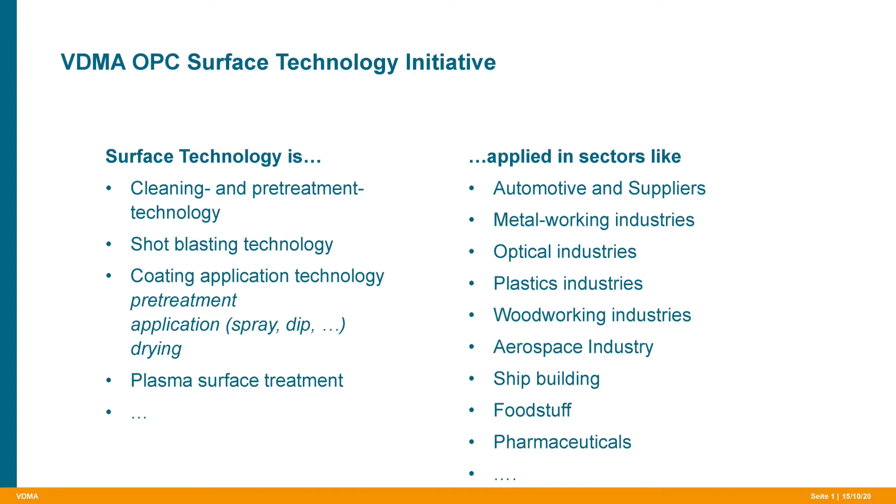Looking at the paint application plant, you can see there is a lot going on. We have pre-treatment, drying, paint application stages, sometimes multiple times, depending on your workpiece and the intended use.

I don't want to go into all the detail here, but obviously this goes beyond what used to be a tin can with paint and a brush to apply the coat on the object.

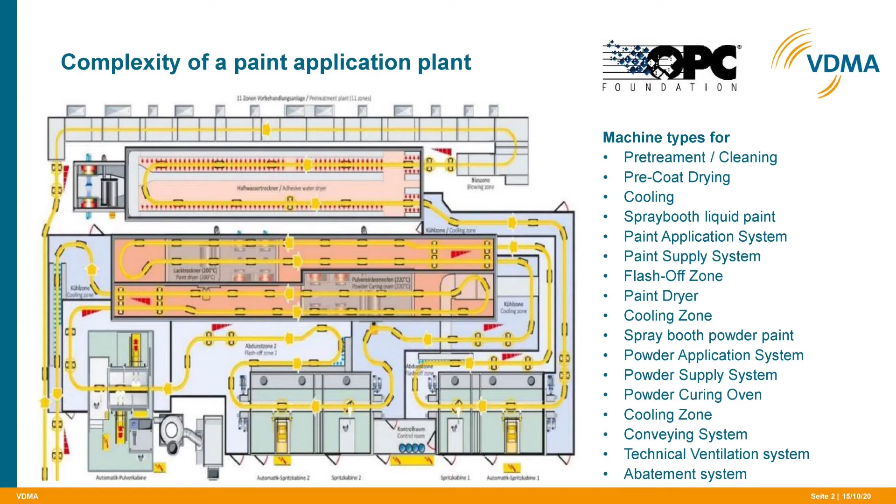The current focus of our working group is on the material supply system. This takes care of preparing material for application with mixing and pressurization and delivering it to the application system, like a spray gun operated manually or a robot-mounted spray nozzle.

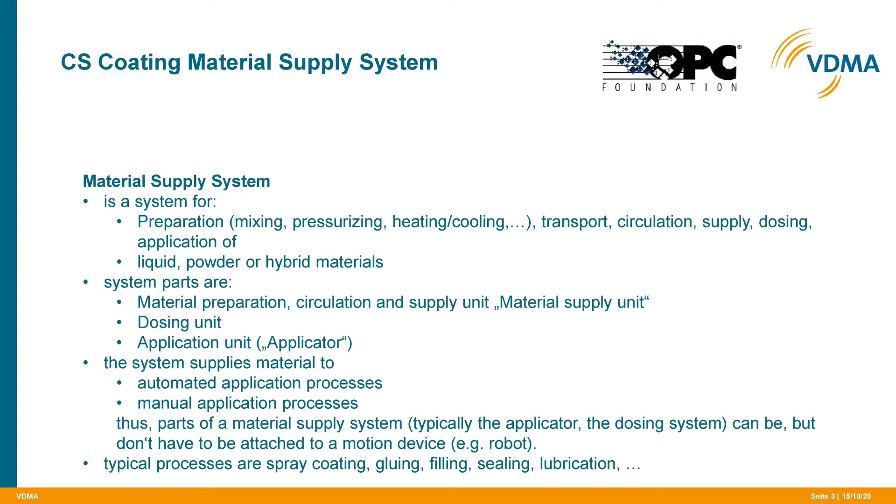Furthermore, we are happy to have academic institutions, software companies, industry consortiums, and trade show organizers as our partners.

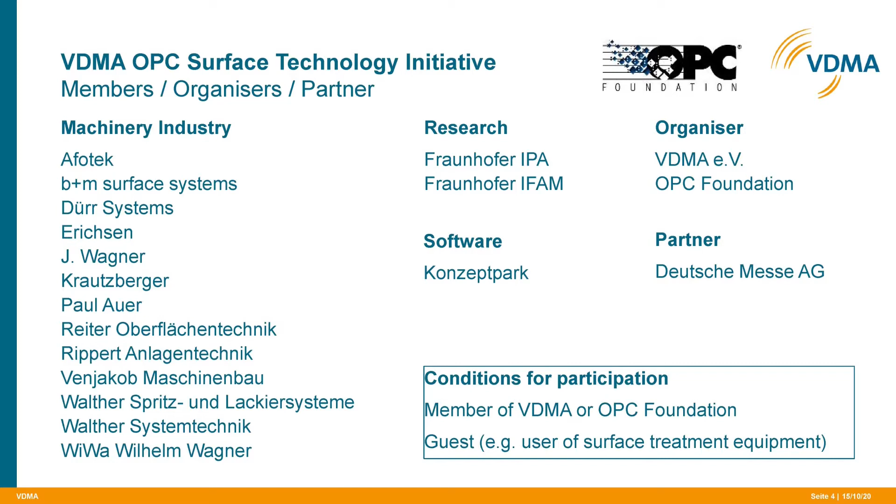Look at what standardization did in the beginning of the Industrial Revolution, where screws, bolts, and nuts suddenly became standardized. USB had a big impact on the usability of computing.

Today, you can plug virtually any device into your computer without hassling with drivers, configuration, and so on. Therefore, integration of parts into systems is greatly simplified, which also speeds up startup times in complex scenarios.

Standardizing parameters is the next logical step in this journey, as a set of predefined parameters that represent best practices will immediately eliminate discussions on problems already solved. Focusing on a project with specific customization is much simpler this way.

An example from my own experience here: a consortium of 6 European companies built a plant in Chile. Despite several phone calls resulting in specification documents, it took programmers from all companies on site about 6 weeks to finally start up the system.

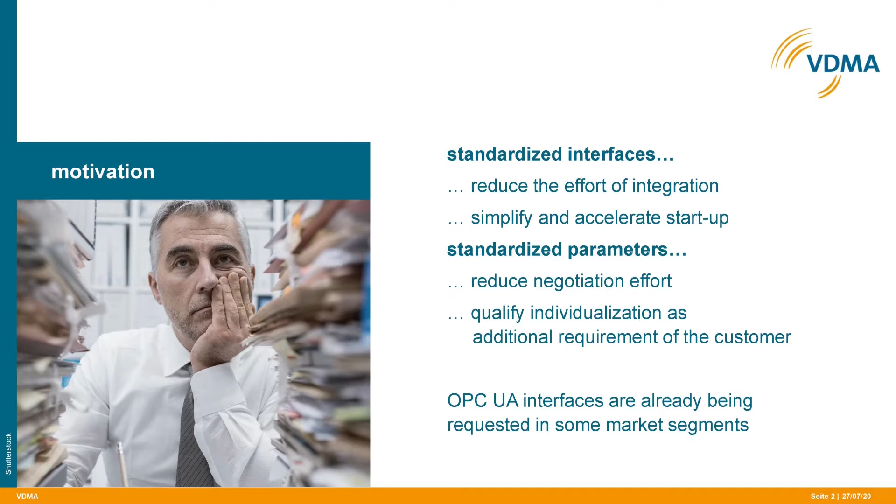...and iron out all the misunderstandings on the interface definitions. Having a predefined framework to start from would have saved every company valuable developer time.

We will look into the spray booth a bit more throughout the presentation, as the current working group focus is exactly on the paint application process itself.

So wrapping it all up, we see a lot of communication going on between various partners that has to be managed in an appropriate way.

Having all these systems cooperate with each other, you will see various vendors, Siemens, Allen Bradley, Omron, Fanuc, and whoever, with their own control systems, their own protocol stacks. All of those have to communicate one way or the other.

Back in the day it was pretty simple. You just hooked up some 24-volt I/O controls and sent 24 volts over that, and if the 24 volts was present, it was good.

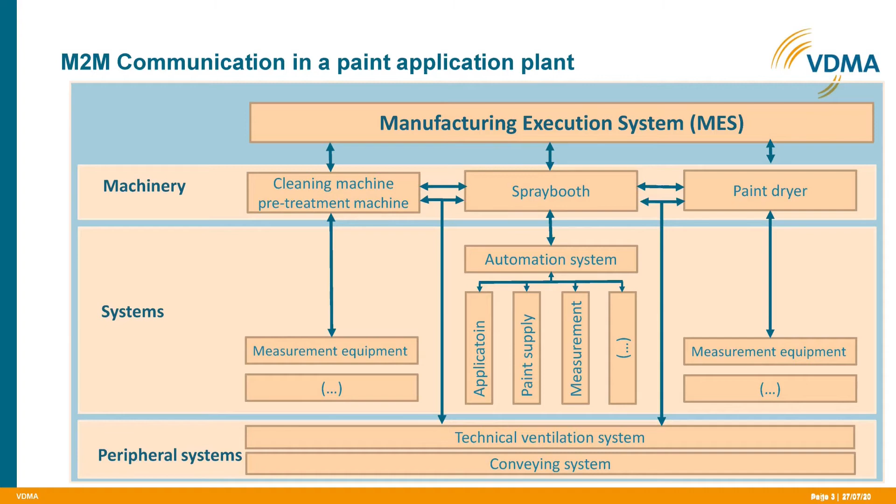If not, the signal was deasserted. Simple, elegant, well, mostly, but not for variables that contain floating point information. So our approach was to model it in the OPC UA environment, and having such a complex and diverse ecosystem around us, it was not an easy task to do.

So we chose the following: first of all, we identified the relevant machines involved. This is actually more complicated than you think, as we will see in the next slides.

Second, we chose a topic for our first companion specification, the material supply system, as those are most likely the core of a paint application system. And third, we defined use cases for horizontal and vertical communication.

Horizontal being machine-to-machine communication, like managing production processes between subsystems, like applying paint and flushing the paint system afterwards. Vertical being MES and data mining, aimed at, for example, quality or environmental reporting.

Fourth, we want to integrate customer needs by looking at specifications from past projects, relying on information and best practices, but this will come more into focus as we progress in our companion specification and start field testing it. Also, end users could join our working group in order to let their voice be heard directly.

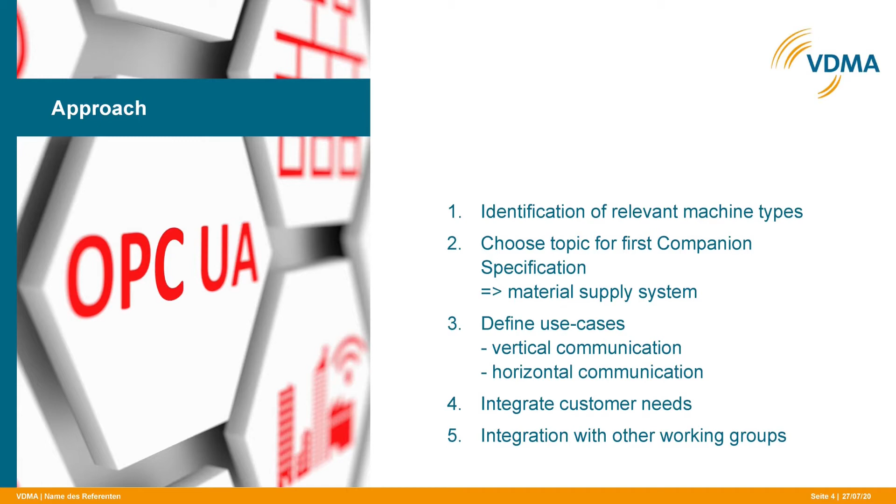Fifth, the integration of other working groups is important to us, as there are many places where we can already benefit from progress made by other working groups, and we could also provide our information to others. We will see more about that in the next slides.

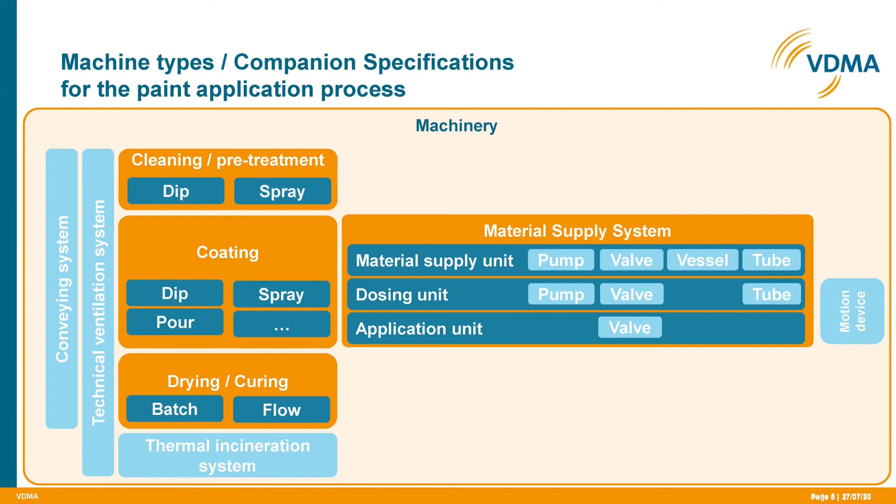The orange boxes represent companion specifications, while the darker blue ones stand for aspects within those. Light blue boxes shown are the companion specifications or aspects thereof we do not want to specify on our own, like for example pumps and motion devices.

Looking at the use cases we defined, those are, first of all, the quality assurance and traceability use case, which will provide time-stamped raw data for high-level systems like MES.

Data transfer between components, as in use case 2, is also within our scope. This is aimed at machine-to-machine communication for improving interaction between systems working together in a process.

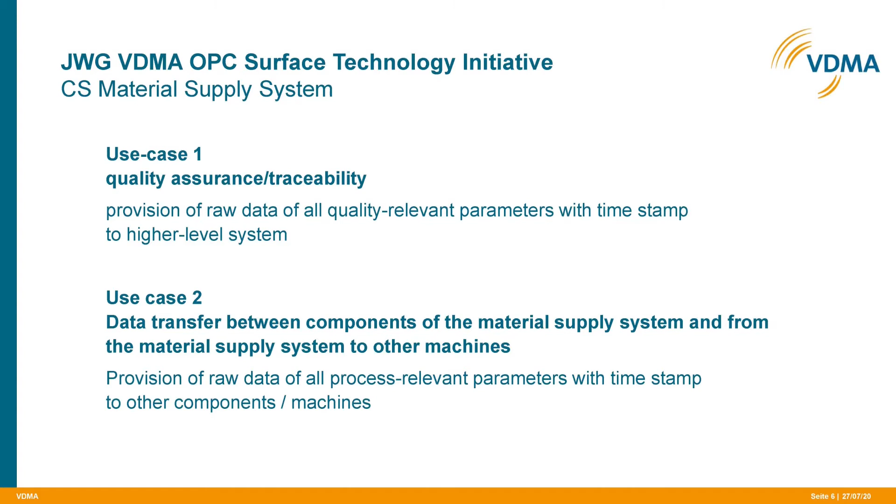Now we're taking a step back and looking at the big picture of the other working groups and touching points with those. This slide shows the progress of other departments within the VDMA and their respective progress in creating their industry-specific companion specifications.

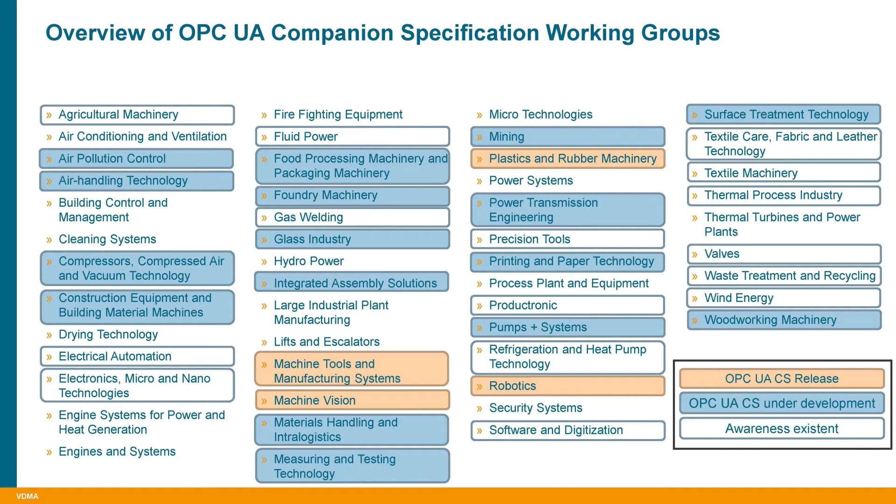Now we show you the interaction between our working group and others. Labeled in red, we see working groups that will benefit from what we specify in our systems and will involve surface technology equipment or similar components.

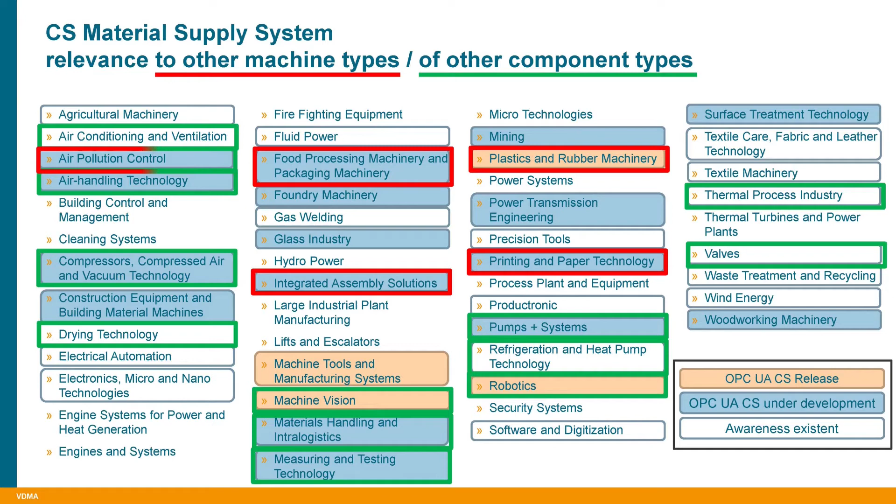Highlighted in green, you will see working groups that provide building blocks used in surface technology and therefore will provide object definitions we could benefit from. This is also the benefit of having the OPC Foundation and VDMA working closely together to bring best practices from the industry directly into the specification processes.

In order to make our modeling more comprehensive, we defined 4 basic elements we can use. Instanceable objects, in green, are meant to be used by users of our companion specification for modeling their own processes in real-world plants. These are high-level building blocks included into end-user system models.

In blue, we represent objects to be used within our specification to model instantiable ones. These objects are not intended to be used by end users.

Properties in yellow are immutable read-only information stored on a device which represents static data like technological system information such as limits, but also user manuals and whatever does not change over the lifetime of a product.

Finally, parameters, shown in orange here, represent process variables that consist of at least one read-only part, like a sensor value, and optionally a read-writable set value for process control.

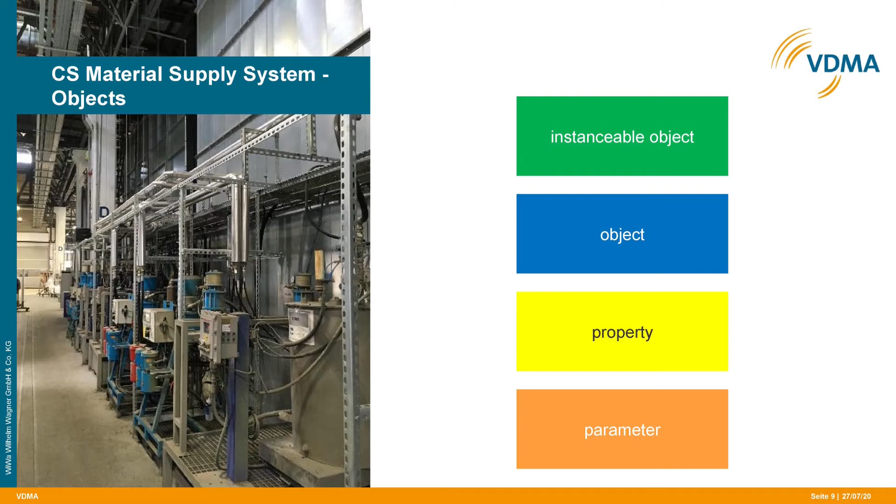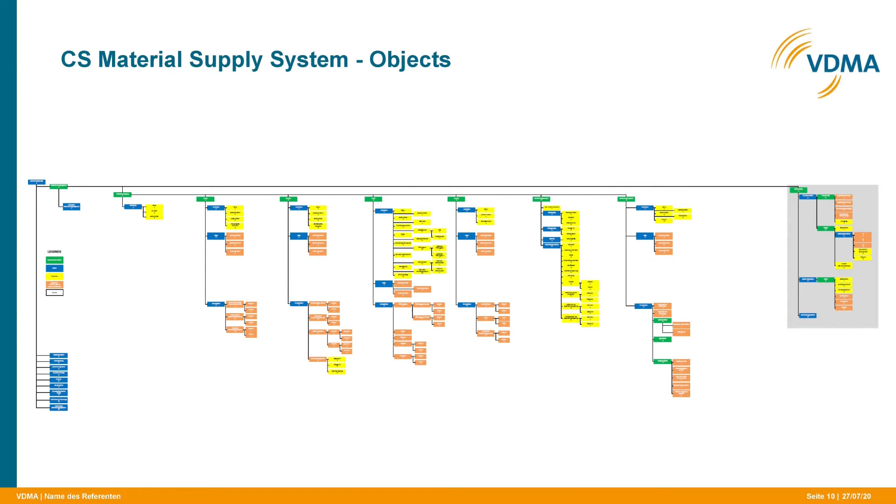Now we can see an overview of the object hierarchy we have defined for a material supply system within our working group so far. As you can see, this is a very complex system and every subsystem itself contains its own instantiable top-level classes.

In this slide we will look at how we modeled a valve. In our mind, an instantiable object contains at least three things: first, metadata, second, state, and third, process data.

Metadata specifies the name, physical location, parameter limits, and administrative information, and whatever is needed for planning, validation, and operation of the unit. Second, there is state, which we consider a basic and mostly abstract representation of a machine's state

for dashboard or cockpit views, in order to reduce information to manageable limits and be the same among all participants within the system. Third, there is process data, which is, in my opinion, the most juicy thing in the whole system. It is very important for managing a process and also documenting it.

Therefore, we can use it for control and quality purposes and predictive and preventive maintenance. Also, this is relevant for machine-to-machine automation, where process data from the previous step in a multi-stage process can be used to guide the following steps.

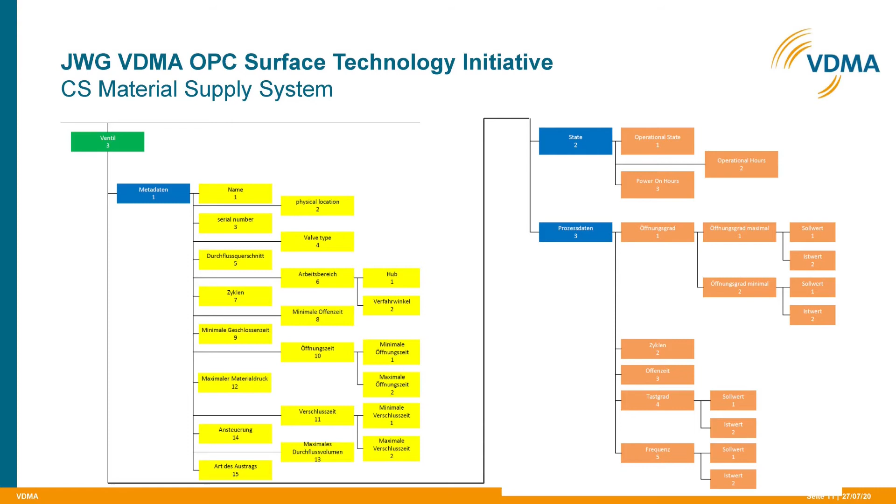This allows for conditionally mandatory information, like for example when you have a liquid coating, you might have information like volatile organic compounds, VOC content, which might not be relevant in a powder coating system.

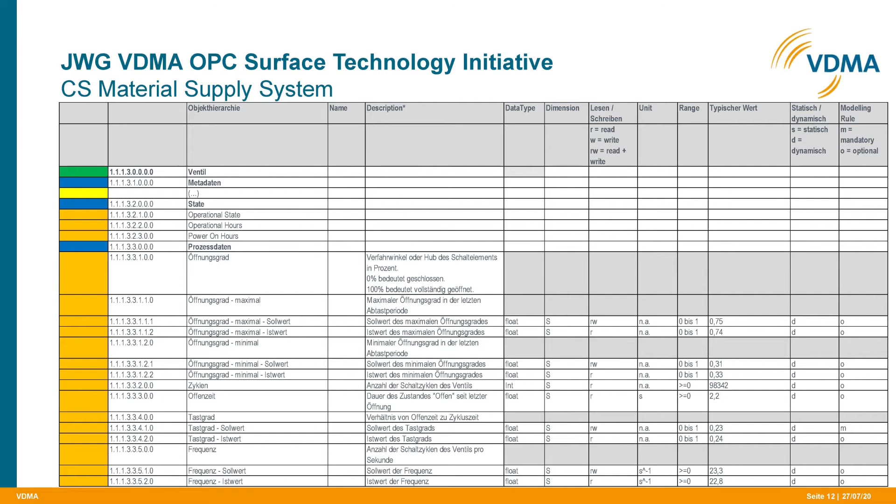Therefore, you can arrange your objects in a way to have the VOC content mandatory if you're describing a liquid paint process while not having it at all in a powder coating process, depending on how you organize your object hierarchy. Now the question arises, who will orchestrate all the elements in a paint application process?

Because as we started out, we wanted to make it easier to orchestrate the complete system and make it simple to bring up the system made from elements that might be delivered by vendors from all around the globe. But also we found out, like in a good concert, it's not only made up by good musicians, but also the timing is vital.

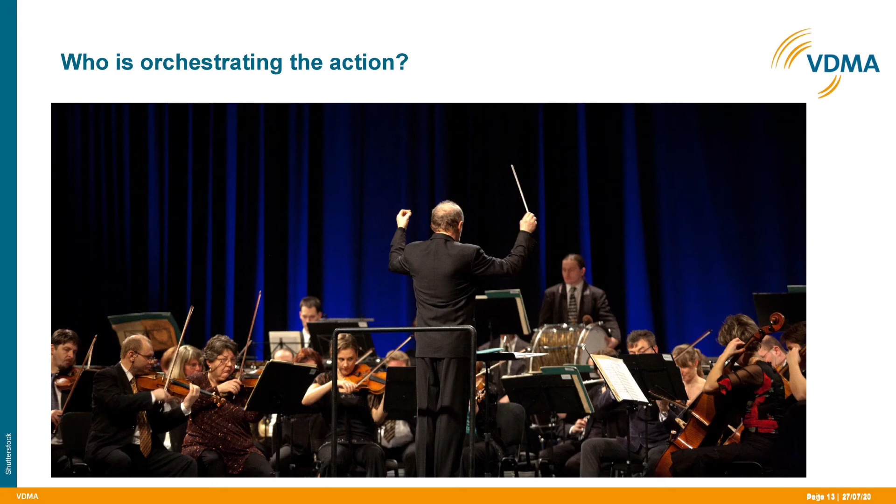Therefore, it is very important to clearly define roles and sequences of processes that all components have to adhere to. But being in such a diverse environment makes it very hard to simplify things.

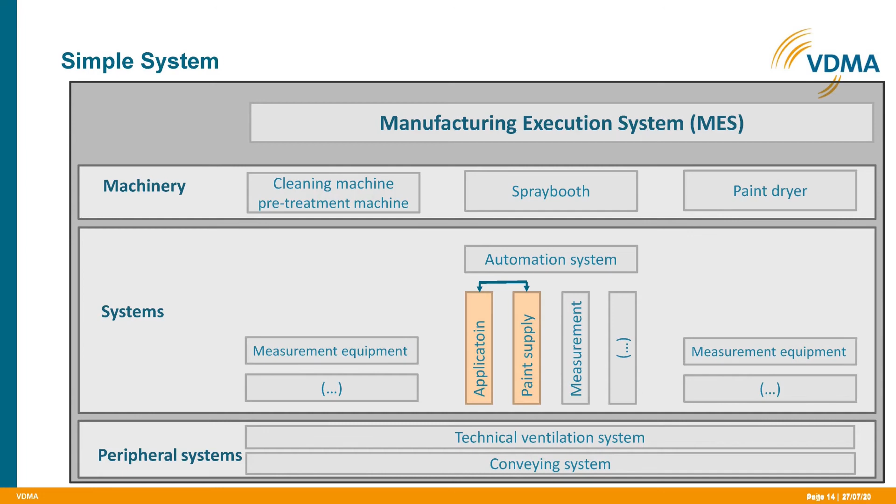In some situations you have a process that comprises only of an application system, which might be as simple as just a spray gun, and a paint supply system that might only be a pump. But sometimes you have much more complicated systems, like the one we show here, and this is the most complicated system we could think of. We have an MES sitting on top of machinery like cleaning and pretreatment systems, a spray booth, a paint dryer. These in turn contain measurement equipment, motion and handling systems, and so on. This makes for a very complicated system.

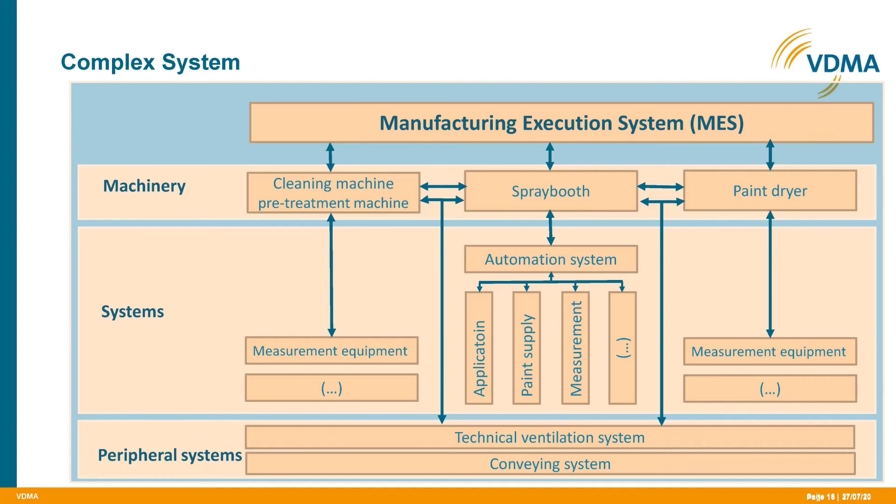Now the question arises, how to make all these widely differing systems cooperate in a proper way. In a big system, you could use the information from the application system, like a robot, in order to control the paint supply system, which in turn could inform an ERP system to procure more material. But this would lead to a dilution of responsibility among all the actors in such a system, and therefore ultimately lead to problems that are very hard to troubleshoot, and changes in process layout would likely cause changes in all other data bindings within the whole system.

In order to make the process scalable, we envisioned a different way of controlling and directing the plant by introducing a new role we call controller. That controller contains the process knowledge, whereas application and paint supply systems only have to do their part and do it right. The controller does not have to be a part of the machine, but is a role that can be shifted or delegated depending on the project size or even change over time. It is the controller's responsibility to provide all the necessary information of what to do and when to do it to all the application participants in the system.

This example shows the flushing process of a spray plant, removing the currently loaded coating material from the system. This might be due to another color to be applied or due to shutting down the plant for maintenance. In our example, we only show the interaction between the controller and application and supply system, whereas it could be vastly more complicated in practice.

At first, the controller tells the application system to prepare for flushing, which means that it should finish its current operation and return to a given point for flushing, which most likely is away from the workpiece and most commonly into a waste container. Also, the paint supply system is instructed what flushing materials to be used and their respective amounts. When both application and supply system have confirmed their respective completion of preparation, the controller goes on starting the actual flush process steps, always waiting for the supply system to confirm the amount of cleaning agent to be delivered. Therefore, we synchronize the flushing process between all the system partners, taking cues from the participants relevant in a certain step.

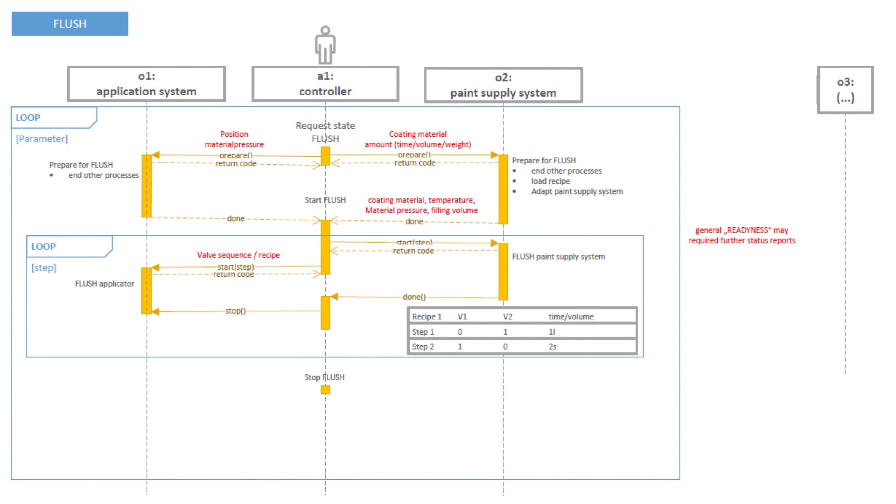So coming to the lessons learned, in our industry it is important to both combine vertical and horizontal communication, as both are very important to our end users. We also recognize that we have to orchestrate the communication between machine to machine, as we have a very diverse spectrum of machinery and their interactions, and this is very project specific. Therefore, we cannot have a one-size-fits-all approach in order to link everything together and chain everything up.

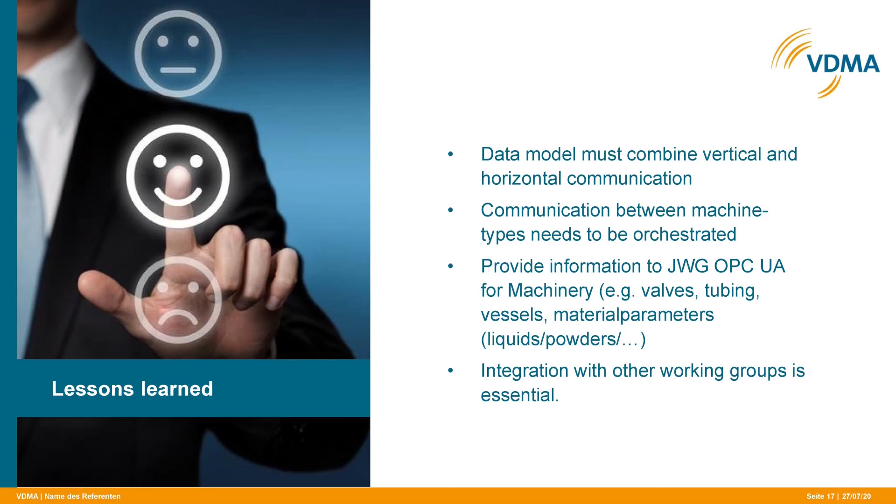And we also try to provide more information to other working groups, especially the machinery working group, as there are so many parameters that seem to be very common between several systems, where it would be a lot easier if everybody spoke kind of the same language, which is the basic idea of the OPC world altogether.

So coming to the next steps, we're just about to prepare a prototype. Once the prototyping stage is finished, we want to go into hardware integration and do real testing with real hardware, which will be a very interesting part of the journey, and we hope that most participants will contribute parts to that system, so we can show a big system of various manufacturers working together in unison.

When the hardware integration is finished, we want to publish the release candidate, because we want to validate the specifications we did in a test field with, as I said, several participants, in order to make a good and viable product to ship out and to have commented on, and not something that is just on the whiteboard and hope that everything will be right.